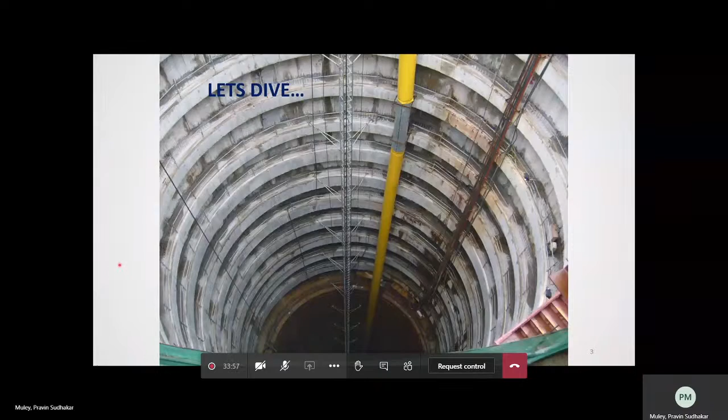So the brief overview of my presentation will be: I will introduce you to the underground structures which are used in urban areas and in remote areas. Then I will introduce you to the cavern. You may know much about tunnels, as in our day-to-day activities we come across these structures. Then I will tell you the difference between tunnels and caverns. And we will see the different types of caverns, or rather the uses of cavern projects for different purposes.

Then I will tell you briefly the excavation sequence of the caverns. It is a bit similar to tunnels, but at certain stages it is a bit specific also. Then I will deal with the cavern construction, how it is being done. So if you see the urban structures, we mostly see housing above ground. If you see working areas like offices and stores, they are also above ground, and some just below the ground, like basement 1 or basement 2.

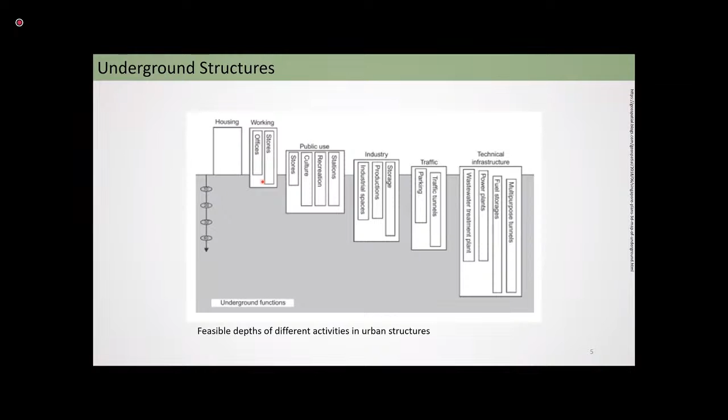Mostly in India, we don't go deeper underground, as we have enough land for horizontal growth. But for some countries like Singapore, which doesn't have a lot of land, it is just a city island, so it becomes very difficult for horizontal expansion of the country. So in that aspect, we need to go underground. For public uses, we can definitely go underground, like stores, recreation centers, MRT stations or metro stations, etc. We can bring these underground and free up some space.

Currently, we don't have housing which is underground, but maybe in future for the metro cities, we may need to go for underground housing. Then for industries, we can bring those industries well deep into the ground. If we say 10 meters, 20, 30, 40 meters, we can go deeper as far as industries are concerned. Because in industries, we work 8 or 10 hours.

Housing, we live psychologically the whole day, so we need to get the free air and light, that is okay. But for the industries, like storage, production facilities, and industrial spaces, we can go deeper down. So here come the caverns. We can make use of the caverns for these facilities to be taken down.

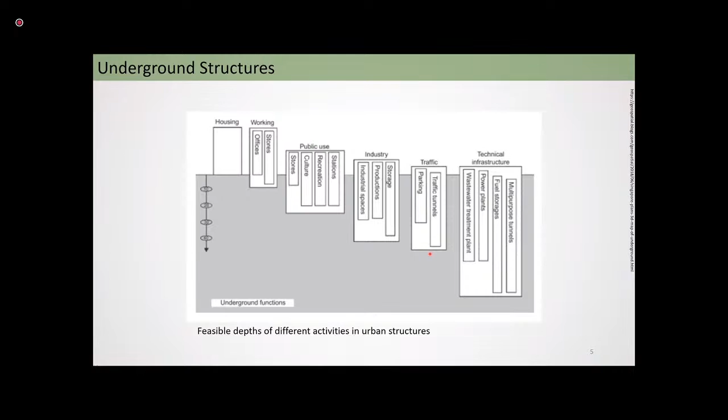So let's see, with respect to a couple of major cities in the world, how they use the different facilities underground. Let's take the example of New York City. In India, we see the power supply, the electrical power, with poles and wires running across and around the roads, distributing to the houses. But in the mega cities, metro cities, maybe Mumbai, Bangalore, etc., we also have this power underground, so we don't see the wires anywhere above the ground.

Then we have other facilities like cables. Nowadays our life depends on mobiles, data, the internet. This is transferred through cables, and carrying it above ground is very risky, so they put the facilities underground. The water distribution system is also underground. If there is a storm, for quickly deflooding some pocket areas, they have stormwater drains. Then gas is provided to each and every household using pipes instead of gas cylinders. This makes life very efficient.

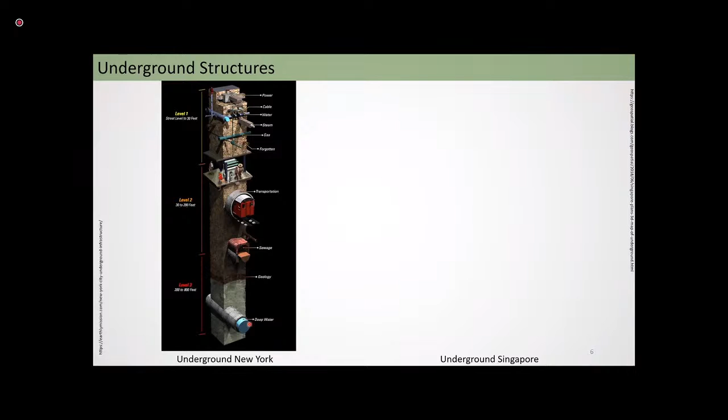Then we have metro stations, MRT stations, or subway stations for transportation. If you go deeper, you have the sewerage system, which transports the sewer water to the water treatment plant. And if you go still deeper, we have deep water pipelines, maybe around 2 meter diameter, which can distribute to suburbs.

Then if you go to cities like Singapore, you can see this vertical structure: in only a small area we can accommodate so many facilities. For example, bus stations, which here in Singapore they call a bus interchange, can be directly under the building. So if you have 15 or 20 story buildings, they can have the bus stations under them, and the buses can ply.

Also, pedestrian links: if you're going across the roads from one building to another, you can have these pedestrian links. As you go deeper, we have different facilities. This is a common tunnel which has the water pipeline, gas line, sewer line, etc., being constructed under the ground. Now this one is the air conditioning pipelines, a new thing you will come across. The entire building is provided with aircon connected with these pipes, which carry chilled water to cool the building down.

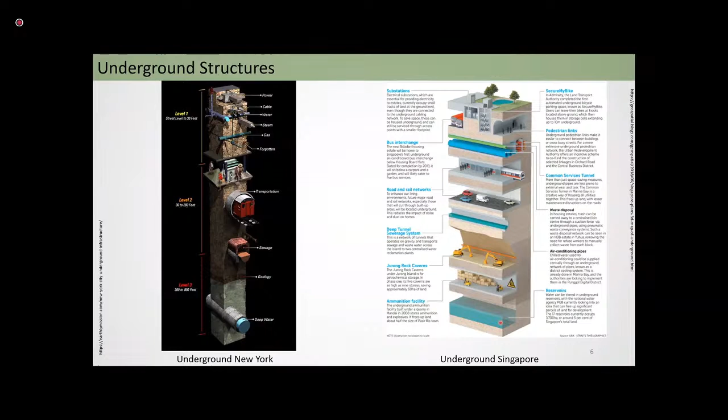So Singapore is planning for underground caverns which can store the water. So some research is going on into these rock caverns which can store the water. But the hills... Singapore government is undertaking this subsea tunnel for the Tuas water reclamation plant. So we'll be doing some projects like that also. So that will be interesting.

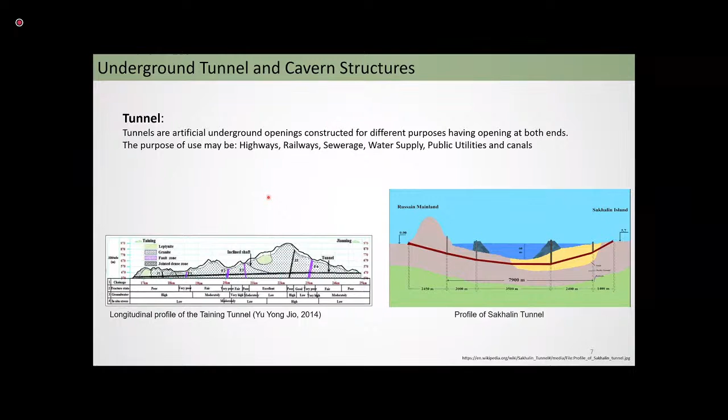So this is a simple definition of the tunnels. I think everybody knows. Then, depending on the geology, different sections, different faults, we design the tunnels. The tunnels can have different shapes, and the purpose of the tunnels can be for highways, railways, sewerage systems, water supply, etc.

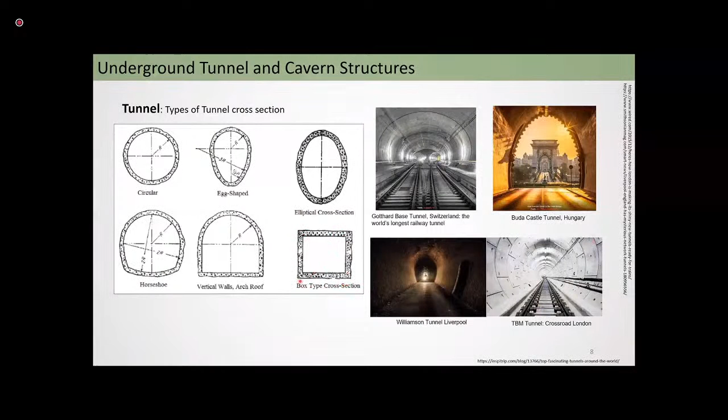Then we have new tunneling systems like TBM tunnels, which are an easy and faster way to do the tunneling. Generally for TBM tunneling, 95% of the tunnels use the circular tunnel boring machine. But now with the advancement of technology, we have the rectangular tunnel boring machine. There are some projects in Singapore that use it. This box type of cross section is generally used for cut and cover tunnels.

Okay, now let's go to the caverns. A cavern is generally a cave, or a large chamber. There are some natural caverns, we know, but for our use, we go for mined caverns. These are conventionally mined caverns using conventional mining techniques such as drill and blast or the NATM method, etc. It consists of shafts, ramps, drifts, forming this cavity, which we call a cavern, in solid deep rock.

For example, granite; in India, we can say basalt, which is also good stone, good geology, and we use it for different storage purposes. For the caverns, I can tell you some of the terminologies. This is the crown of the cavern. This is the invert. And when you start the cavern or tunnel at the hill, that is a portal. The first cross section is the portal.

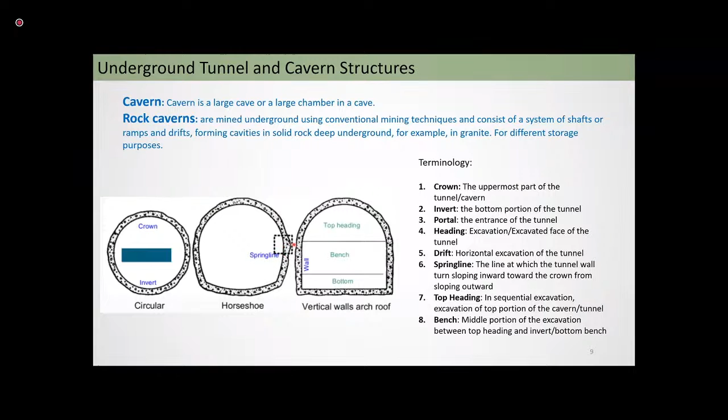Now the spring line is very important when you go for the design of these caverns. This is a spring line. This one is sloping outward here, and you see this one is sloping inside. So this junction line here is the spring line. Okay, so these are some terminologies that we use. This cavern can be of these shapes as well as this one.

This is the Jurong Rock Cavern, which is excavated in top heading and benching. This is another Science City project in Singapore, where we are planning different headings and benches. So here, the Jurong Rock Cavern is 20 meters wide and almost 27 meters in height, as good as a 10-story building. So this is a huge cross section, and it runs around 340 meters long.

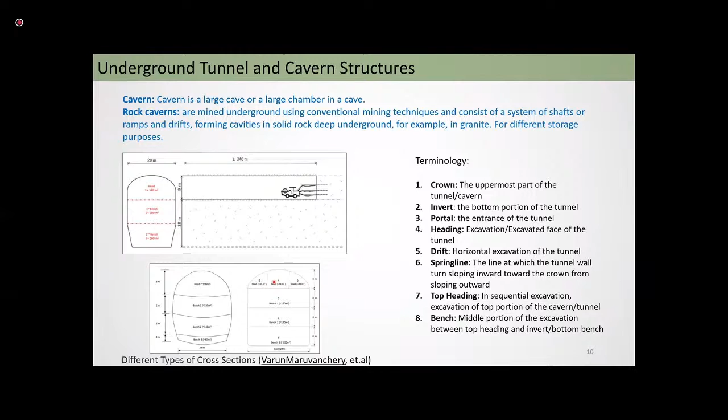Okay, so this is the slash or drift, we can say. This is the heading, then we can have the benching. So different ways of excavation. Now, what are the benefits of this cavern structure?

So some of the benefits for the community regarding placing facilities in rock caverns are tangible and some intangible. So intangible, like removal of incompatible land uses from the local community. Incompatible means suppose in the metro city there is one company, because the cities are growing, and if there is some factory or some other facility which we don't need day to day, and it is making noise and creating air pollution to the surrounding areas,

then what we can do, you can just take out that factory and drill a hole, or that is the shaft, and put that under the cavern, and we can take care of this air pollution, and we can save some land. We can have the open space, make some gardens, plant the trees, and then we can reduce some air pollution.

If you see the air pollution in cities like Delhi, it is very toxic. It is around 250, 300. It's criminal to have this air quality, but we don't have any option, so we can use the caverns, put the facilities underground, and then we can reduce the air pollution. We can use the caverns for parking, and some tunnels connecting to it for reducing the congestion in the traffic, so we can make the traffic faster and the air pollution can be reduced.

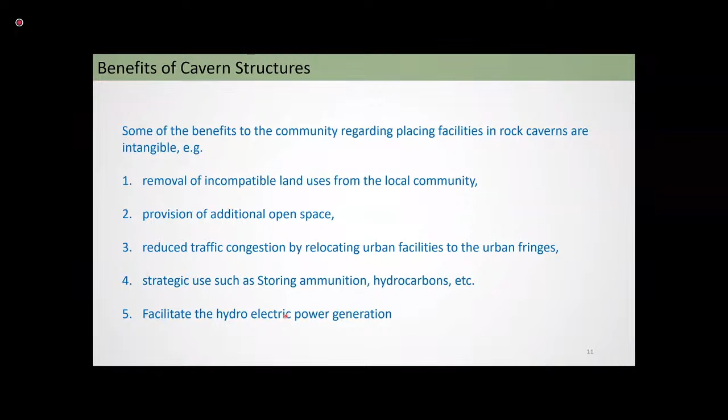And hydroelectric power generation, if you have some hilly areas, you can generate the power by using the caverns. So these are some tangible and intangible benefits of the cavern structures. Let's see what are the uses of these structures. Okay, now in Turkey there are some cities which are underground because of the high heat, or because of the enemies invading their land.

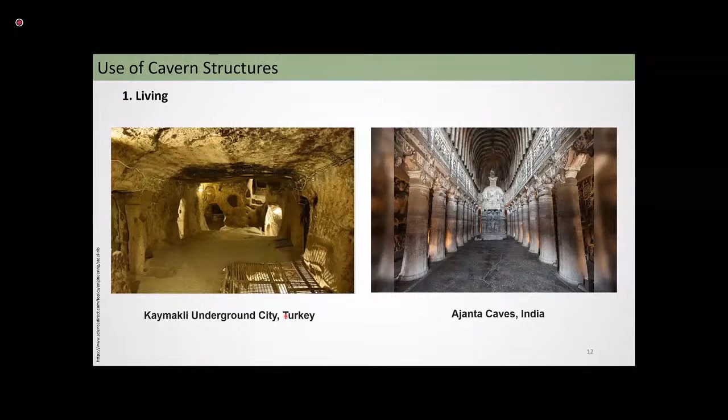The people in Turkey formed underground cities, like for example Kaymakli. Then if you go to India, you can see the Ajanta Caves. Most of you have visited the Ajanta and Ellora Caves. The Ajanta Caves were used by Buddhists for meditation and for living purposes. So this is one of the good examples of using caverns. All these are carved into the rock. So we can see these as caverns, and they worked as fantastic homes for them.

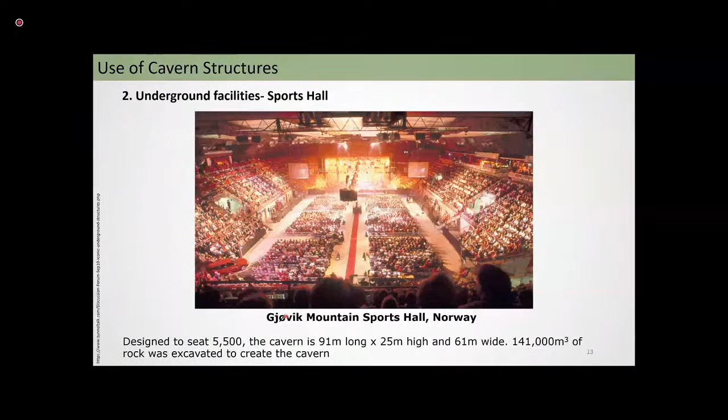In 1994, during the Winter Olympics, Norway constructed this beautiful Gjøvik sports hall. This sports hall is very huge. It's 91 meters long and 25 meters high and 61 meters wide, and it has excavated 141k cubic meters of rock. So the Winter Olympics was held here, and it got a lot of accolades across the world. We'll see what the excavation sequence was for that.

Now, sorry. Some other examples of large caverns are the metro stations in different cities like London or New York. So you can see here.

Sorry, I'm getting some call. I'll just mute it first.

Okay. So this is the cavern underneath the Grand Central Terminal, which will work as a concourse for these train stations. You can see the 4 trains coming in. So they have dug this tunnel using the tunnel boring machines, and they rested these tunnel boring machines inside this area, because taking these tunnel boring machines out from this area was very expensive. That's why they dug some area here and buried these TBMs over here.

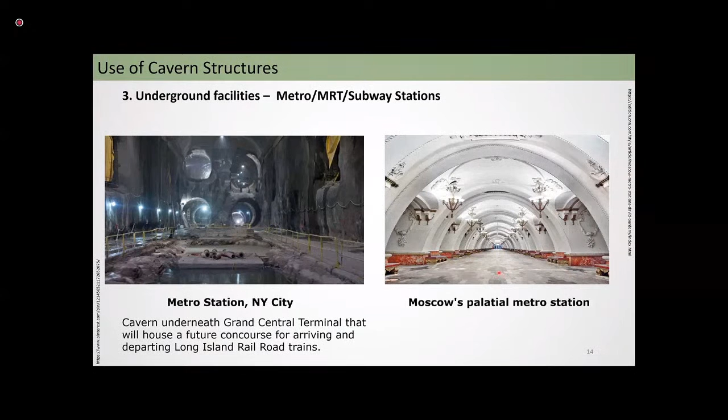And this is another example of the metro stations in Moscow, which look aesthetically very beautiful, and they look very majestic when you see these Moscow train stations. These are nothing but caverns.

If you see today's world, we are connecting through computers. If you work on your laptop for 2-3 hours, we can see that a lot of heat is generated, correct? And if you see these data centers, these are huge, very huge. So the main thing for the data centers is to keep them as cool as possible, and it becomes very difficult because in India we have many seasons like winter, summer, etc. So the temperature variation is very high. To keep these data centers or these computer labs cool, it becomes very difficult.

So if you move this facility underground, then we know that an underground facility will have a constant ambient temperature. The temperature will not change, the humidity will not change, so it will be easy for us to maintain the temperature and the humidity inside the caverns. And since the access points are limited, we can control the entry and exit for the data center. Also, the possibility of attack on these data centers will be limited, as it is underground, and it will be difficult for enemies to throw bombs or launch rockets at it, saving the data, because data today is very, very important.

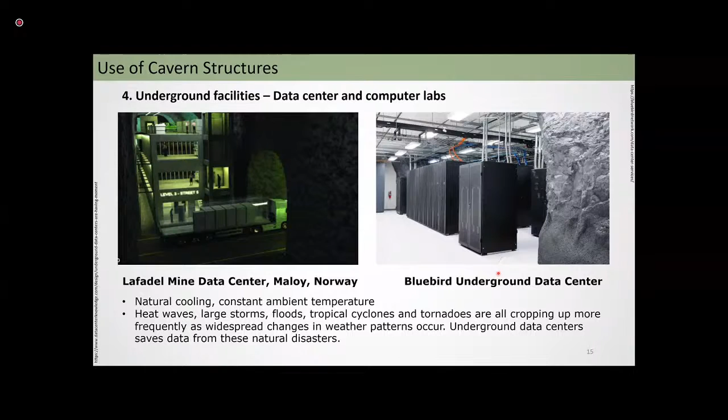Another thing for above ground data centers is that heat waves, dust storms, floods, cyclones affect the working of these data centers, and their expenses grow multifold. So in order to save those, we can use these underground structures like caverns.

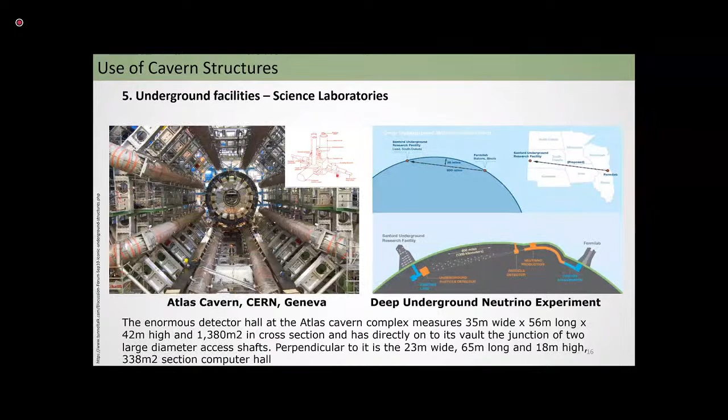But this facility, the cavern, is very complex. So you can see this is the facility over here. This is the cavern, and these are the different shafts. And this is the tunnel, which is used for shooting the neutrons. This is around a 27 kilometer long round tunnel for experiment purposes. So this is a very good example of tunnels and caverns. We can use these caverns for storing compressed air or some other gases.

There is a special way of excavating these caverns. These caverns are generally 20 meters in diameter and around 200 to 300 meters in length, depending on the geology. So these are large caverns which are excavated in salt formations. In the salt formation, they drill a hole here, and then they send water under pressure, and the salt gets melted and it is pumped out by sending other gases. So this water comes to the surface as brine, and then they dispose of it.

And then this cavity, which we call a cavern, is used for storing natural gas. Another example of the use of natural gas or compressed air storage: in some countries, for electricity consumption, there are different time zones, meaning peak hours and off-peak hours. If you use it in peak hours, then the rate for electricity consumption will be high. Rate means the amount of money you are paying is higher than in the off-peak period.

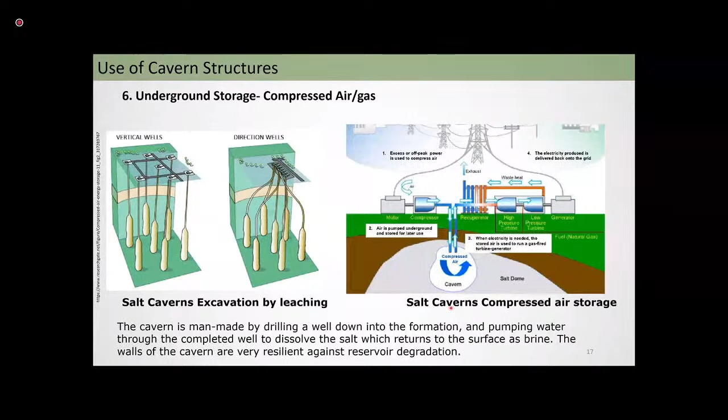Because up till now we have done a lot of research, etc., but we don't have anything which can store the electricity. We can use the capacitors or batteries, but those are not the best way of storing the electricity.

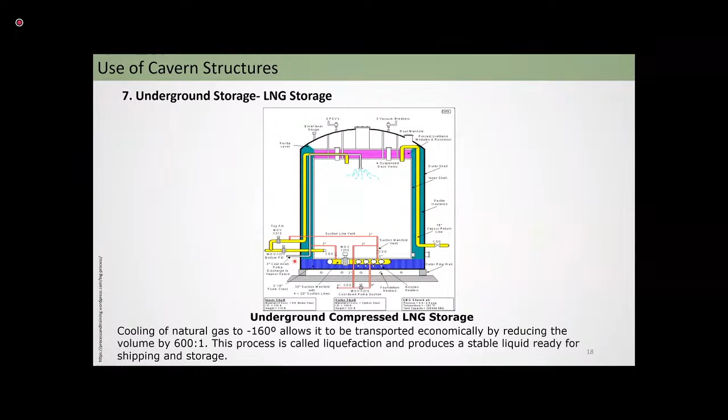Then another thing is for storing the liquefied natural gas. When we cool down this natural gas at minus 160 degrees, we can store it with the reduced volume of 600 to 1. So 600 meter cube of gas can be stored into a 1 meter cube area. So this is a very strong room or cavern, which is underground with a very high thickness of concrete. This is one of the uses of these rock caverns, for storing LNG. Another use is for oil, naphtha, or petroleum products.

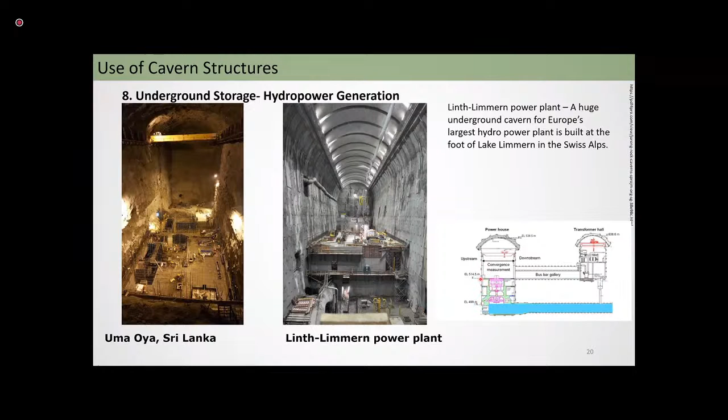Then another use of rock caverns is for power generation. Generally this is 25 meters wide and around 50 to 60 meters in height. This is one of the examples in Uma Oya in Sri Lanka for hydroelectric power generation. They are doing the basement for the turbines, so the turbine facilities will be here. If you see this Linth power plant, it's already constructed. Inside are the turbines, which will be connected to the penstocks. So this is another example.

Now let's go to the excavation sequence. Because caverns are huge structures, the geology varies from meter to meter. So it is not possible for us to excavate the full face. If this is 30 meters and this is 20 meters, you cannot have equipment capable of reaching this height and excavating it. So the best way is to have different benches: a top heading over here, and then the benches.

Okay, so in that one also, if you are not sure about the geology, generally these rock caverns are placed based on the geology. We drill the boreholes, and based on the boreholes, the geotechnical engineer, geologist, and the other design team will decide whether we want to go for the rock caverns in this location or not, because excavation is a very big issue.

Another thing is that if faults are present in that location, then it is very difficult for the excavation. Even after the excavation, if the faults are active, then it becomes difficult. The cavern will not be stable. So based on the judgment from the geologist and the geotechnical engineers, the location is fixed.

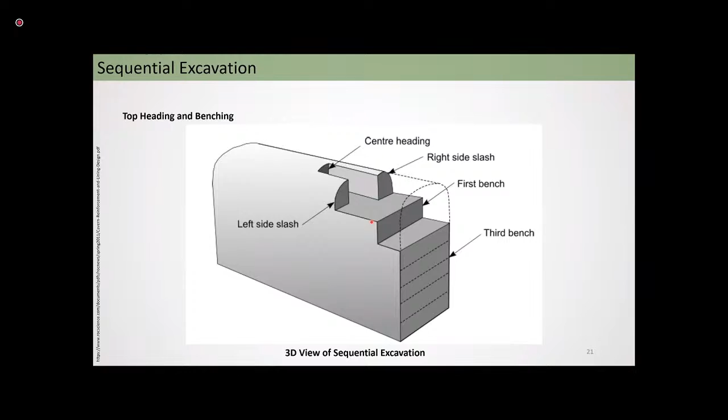After every excavation, the geologist needs to go there and find out what is the face of the rock, what is the geology. For that they use Barton's Q system to know the quality of the rock, and depending on that they will decide the next excavation sequence.

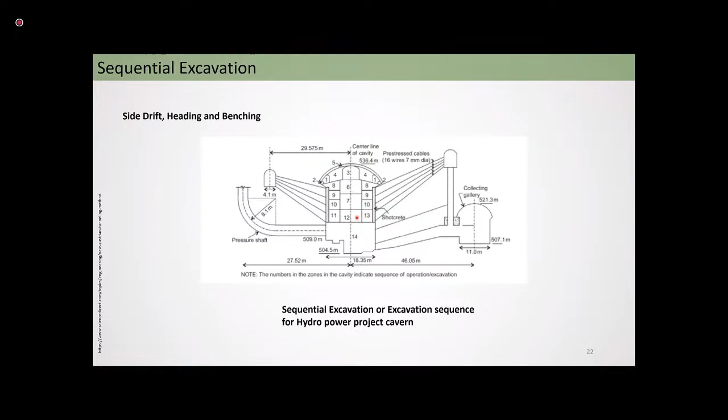So here's another example for the powerhouse, which has a different excavation sequence. This is one cavern, this is another cavern, and this is the third cavern. Either we can start the excavation at the same time, or we can start the excavation one after another, like you excavate this one, then this one, and then you go for this one. That is also decided beforehand, and this is the excavation sequence over here.

Another thing for deciding this excavation, apart from the geology, is the logistics. How many drill jumbos you have, how many trucks for mucking the material you have, how much manpower you have. All these factors come into account, not only the geology, to decide the excavation sequence. And also the duration of the project plays an important role. If you want to complete the project earlier, then we need to have many shifts, more manpower, and more sets of equipment.

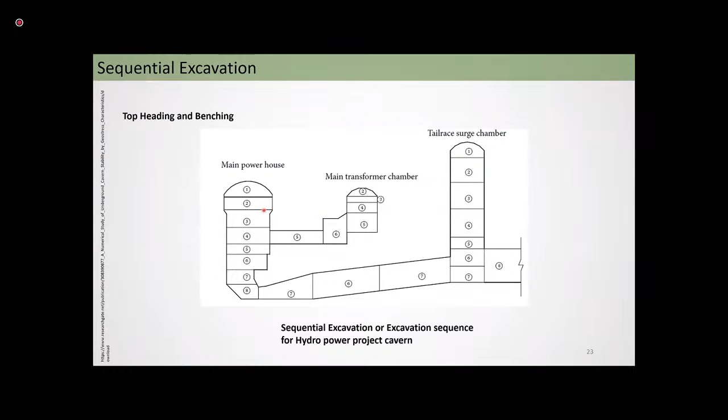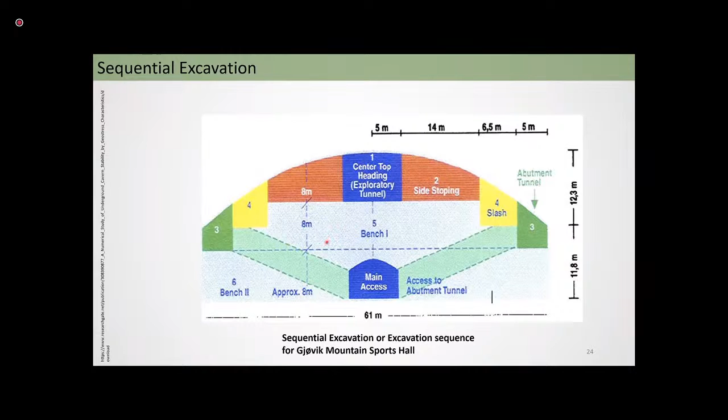So once you decide the geometry of the cavern, then we go for the boreholes and we find the geology. Based on the geology, we use software to create a model and carry out the numerical analysis. The software can be Plaxis, UDEC, 3DEC, NMM, RS2, RS3, UnWedge, etc. These are different softwares available in the market. You choose based on which is available in your company, or maybe which your company can afford.

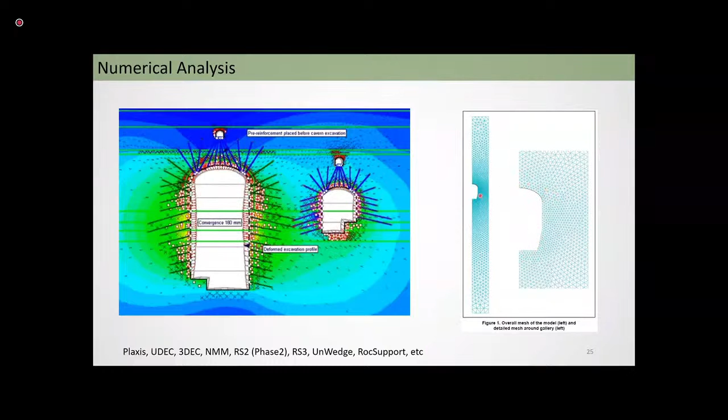Then we have to propose some monitoring for the cavern roofs, cavern walls. When I was in NTU, I worked on the monitoring for this Jurong Rock Caverns and some other facilities also. I've developed the fiber optic cables, which are capable of monitoring the entire cavern.

So for the convergence monitoring, we use these fiber optic sensors, which we have developed in association with the Omnisens company in Switzerland, and Brugg Cables, which is also in Switzerland. So we had the collaboration and we developed this one, and we have applied this one to the Jurong Rock Cavern project for the monitoring.

Okay, now how the excavation is done. For the tunnels, we can go by using the drill and blast, or the NATM, or maybe the tunnel boring machine. Best is the tunnel boring machine. The geology doesn't matter. We just go from one end to another. We need to adjust some of the parameters, and we can easily do the tunneling using the tunnel boring machine. But here the size is enormous. We don't have a tunnel boring machine which can excavate the caverns.

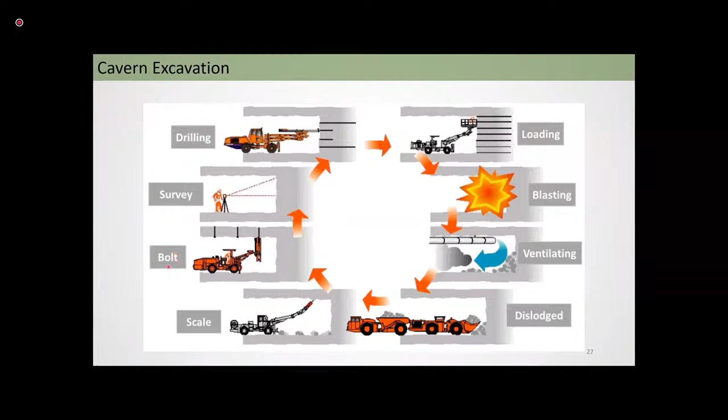Generally, this excavation support ratio, ESR, is 1 for the rock caverns or hydrocarbon projects. When the project is of very high importance, such as storage of ammunition, then this ESR we can reduce to 0.5. If the caverns are for, let us say, storage of just goods, then this ESR we can increase to 1.5 so that the design will be economical.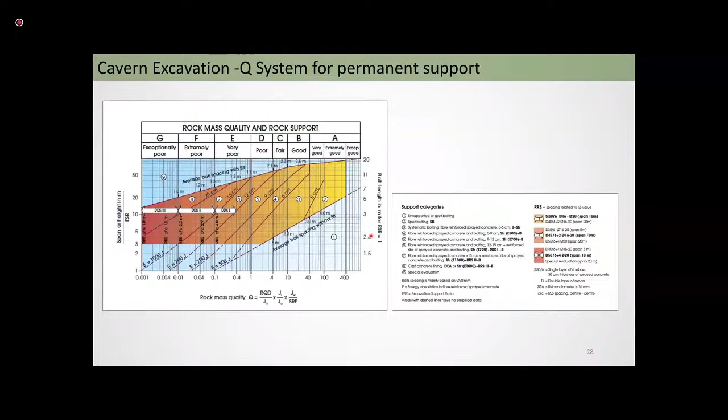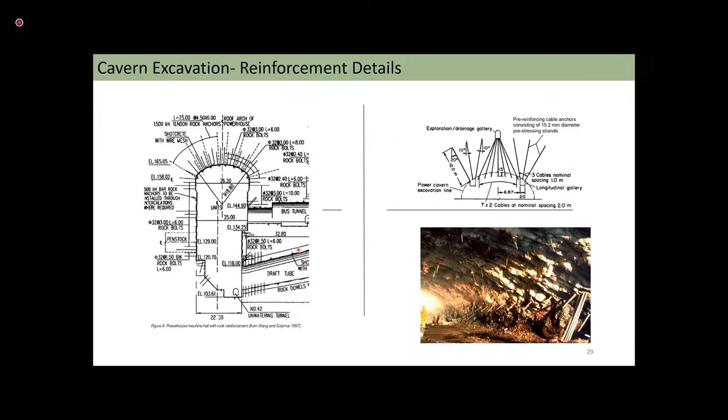And this is the wire mesh we use. Generally, we use 10 millimeter diameter, 100 by 100 spacing wire mesh. Or sometimes in the walls we can use SFRC, steel fiber reinforced shotcrete, which nowadays is a trend. So you can see these are the rock bolts over here. So this is the end of my short presentation.

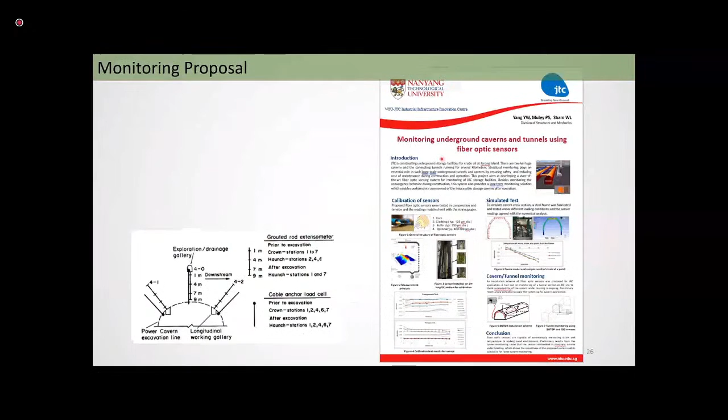Sir, can you share with us any challenging moment you encountered during any of your projects? Oh, challenging. While I was giving you the presentation, there were calls coming from the contractor. So every time is challenging. If nothing is challenging, then these projects will not work. Especially the geology. When we were doing the Jurong Rock Cavern project, do I have any slide for it? Yes, here.

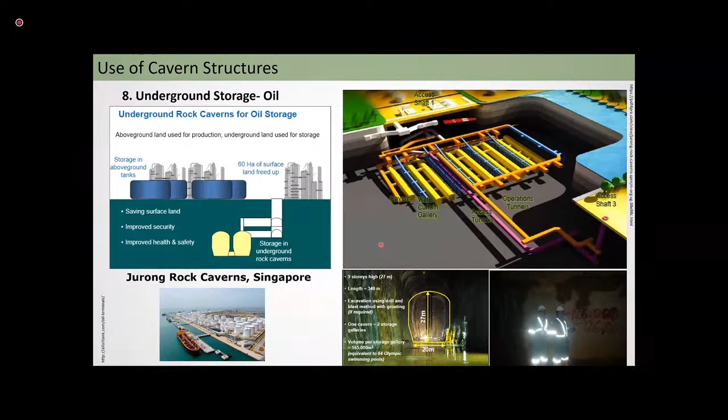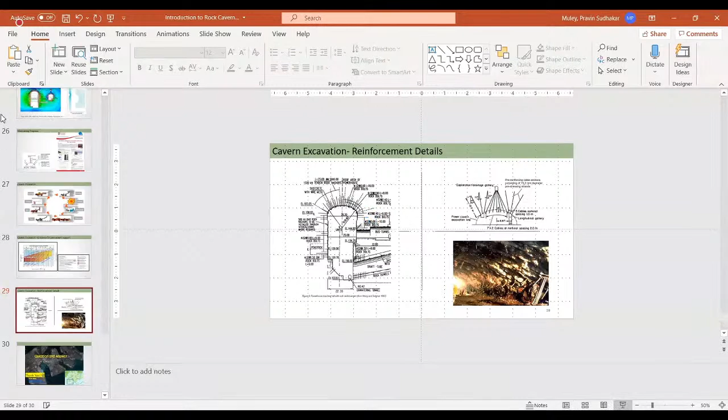At this location somewhere, we had very high water ingress, which we didn't foresee. Our numerical analysis was saying that water ingress was well within the limit and our shotcrete lining could take care of it. But when we excavated this water bearing zone, it started flooding in. And since this project is partially under sea, it was very difficult to contain the water.

Okay, so here you can see this is the sea, and somewhere we encountered the water over here, and there was no possibility for us to stop the water. We called in the experts. We tried our best to do the grouting from the horizontal direction, vertical direction, from the top, but we couldn't contain this water. We even called experts from Europe and America, but we couldn't do it.

So we had to change the adit. That was not exactly the cavern location, but the adit tunnel going to the cavern. So we needed to keep that area in abeyance. We had to fill it back and find another way for the adit to go to the rock cavern. So that was very challenging, time consuming, and very expensive, and we have learned from it.

Now today we are doing DTSS2, that is the deep tunnel sewerage system. So they are doing the tunneling, and during this tunneling, in Singapore we do not allow CHI, meaning cutter head intervention, where we stop the TBM and check the TBM cutters, and if required, replace them. We don't allow them to do it in mixed ground conditions, because in Singapore the soil condition is not good.